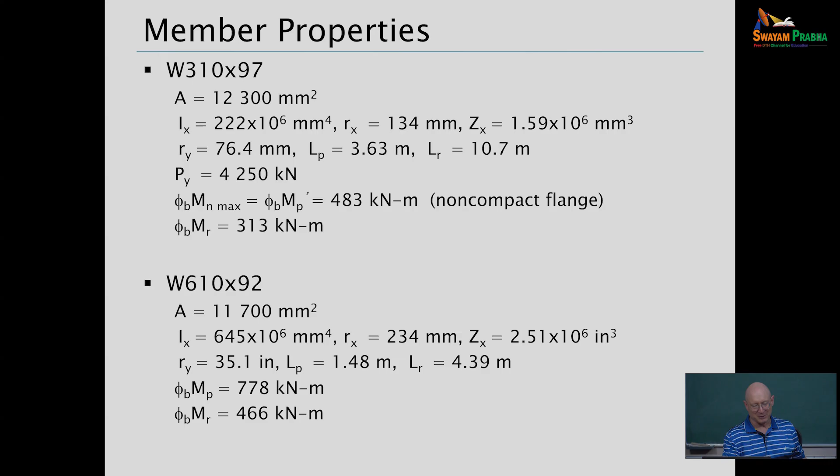Now, a few other things. Often when I do this example with my class at Georgia Tech, I'll bring some handouts on some of these pages so you can keep these in front of you as we're looking at further things. This is kind of a summary of information that we'll use as we move further, in terms of the section properties and some of the capacity properties for these members.

So, big picture here - this is the type of structure if you're thinking about where can I encounter the largest second order effects, where I have to be really careful. It's not on a high rise. On a high rise, lateral load is important, but we're going to need to control stiffness on a tall frame, and you get P delta effects, not like what we're seeing here.

In a structure like this, there's very little wall area on the end of the building to catch wind, so you're not getting big wind loads on the overall structure, relatively speaking. The structure tends to be relatively light, so seismic is relatively small. But if you're in an area where you got a big snow event, you got a huge amount of load from snow on that roof, and it's a big footprint of the building. Guess what? Because your wind loads were low, your seismic loads were low, you don't have much lateral stiffness, but now you got a huge vertical load - you're going to have a tremendous second order effect.

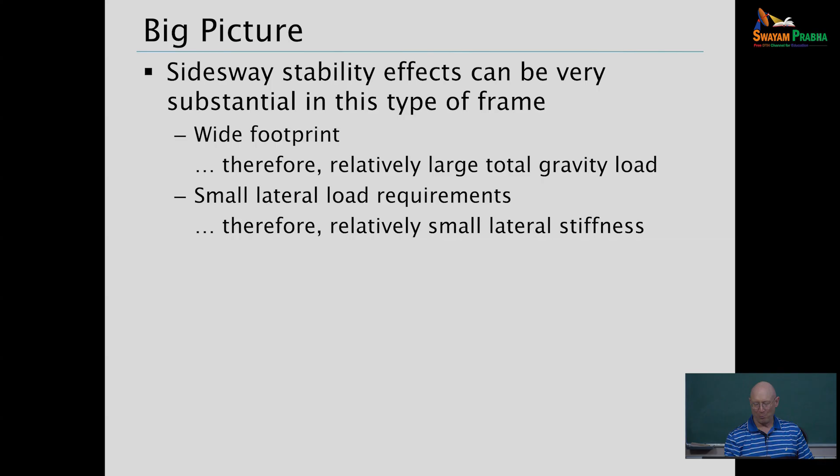And metal buildings, typically the metal siding, the cladding on the structure is very forgiving, very flexible often, so we can tolerate large drifts. We don't have to worry about controlling drift for serviceability considerations. Everything's in the mix there to where you've got to be really careful on this sort of structure with your sidesway stability effects.

So again, if you want to keep this page in mind - this is something where often I'll provide this as a handout so you can look back at this while we're working through things. There's nothing special about what I'm showing you here on this page. It's a way that I'm going to set things up to do the bookkeeping for our analysis.

What I want to do is run a unit lateral load analysis on the structure and document what moments and axial forces I'm going to get. Then for whatever values of axial forces and lateral load I need to work with later, I can multiply that by the results for the unit lateral load and add the effects up.

Okay, so there's my unit lateral loads. I'm putting half on each side of the building just to avoid any small axial shortening or elongation effects in the roof girders. If we consider the first order sidesway due to H - I need to make sure we're all on the same page - we're running the direct analysis method here, and so by AISC rules...

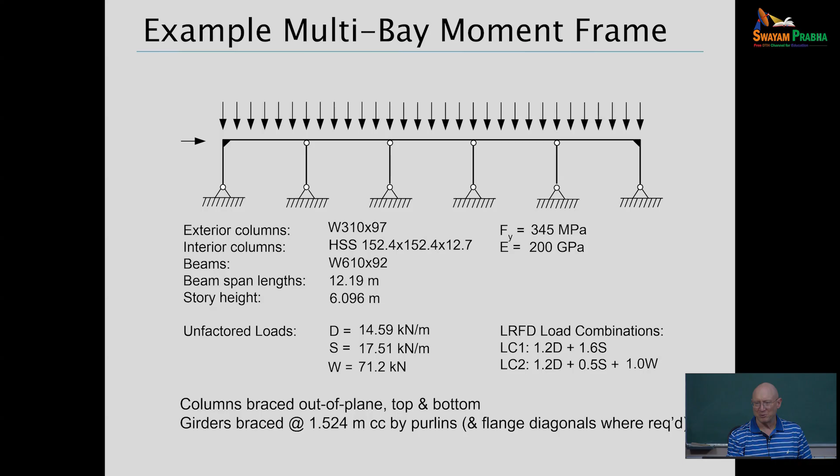But here's where things are very different in the Americas. We would say, on this frame, if I'm going to do the direct analysis method, I'm going to analyze everything with 0.8 of the nominal elastic stiffness. That's a very rough attempt to approximate the stiffness I'm going to lose from yielding, etc., as we're approaching strength conditions. So all these analyses are being done that way. Well, these are first order analyses.

So if I do the analysis, what's my first order drift? It's 1.698 millimeters. That's with the reduced stiffness. And so I can do a PL story here on this, H divided by delta H over L.

And so I get from that calculation 3,590 kilonewtons per radian. That's a stiffness in terms of a drift ratio. If I want to think about what are the two columns on the ends of the building doing, they're both essentially contributing half of that story lateral stiffness.

So PL being just the lateral stiffness for an individual column, half of PL story here. And if I equate that, this is just a way of trying to understand what sort of stiffness characteristics we have in our structure. So I could calculate PL as a coefficient times 0.8 E I divided by L squared. If I take that, I know E, I know I of the column, I don't know beta L, I know L, I equate that to half of PL story, solve for beta L, I get 1.884.

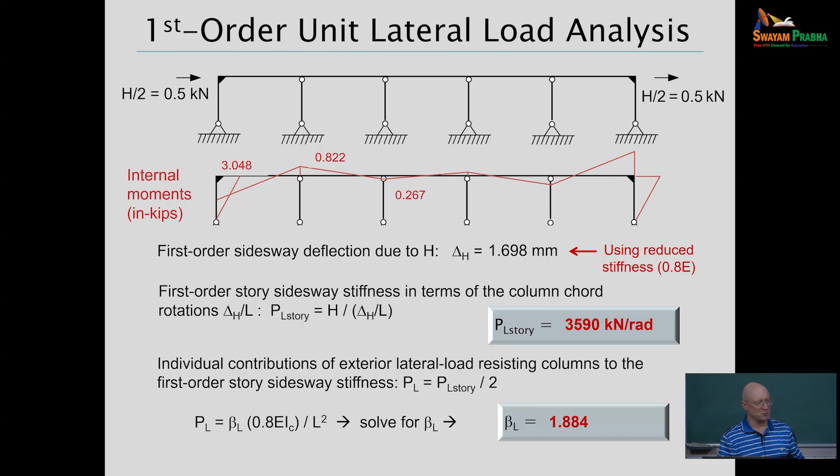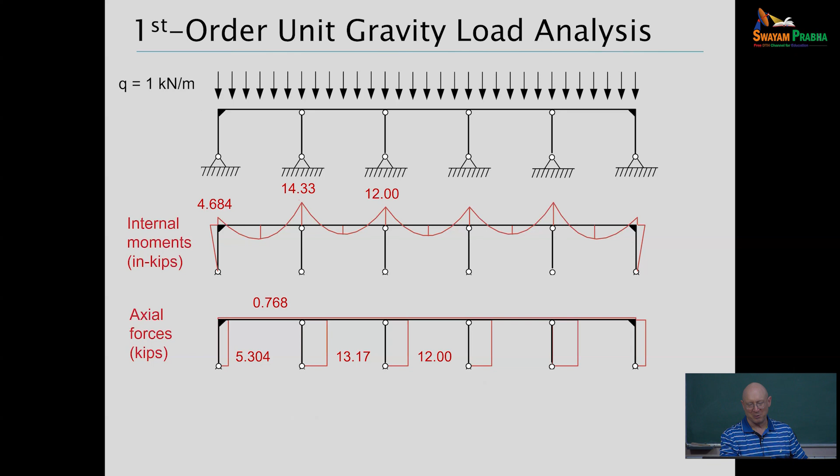You've got 1.884, so that's because of the flexibility of the roof girders. If the roof girders were rigid, I'd get to 3. All right, I'm going to do also a unit gravity load for bookkeeping purposes. So we'll need to glance back here with some of the things we're going to do in a minute for the bookkeeping.

All right, so let's analyze load combination 1. It's 1.2 dead plus 1.6 snow. We want to look at checking our design by the direct analysis method. We'll use the amplified story drift method and the B1, B2, or NTLT method that I showed you earlier, and we'll compare to general purpose analysis results.

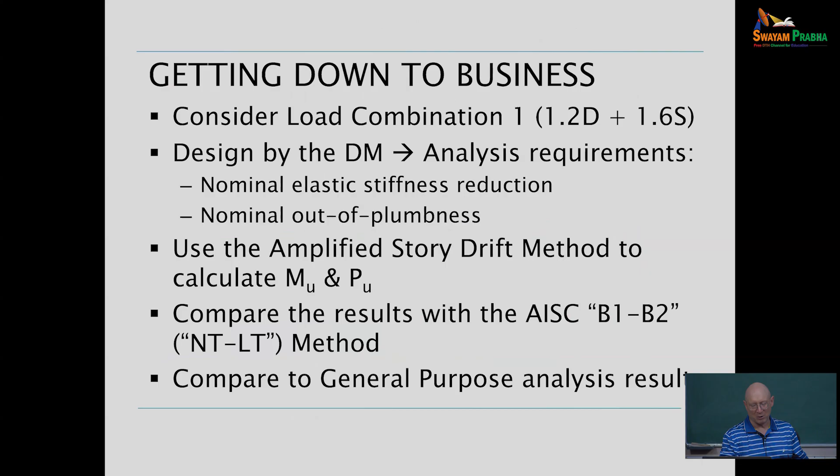All right, so we need, if we're going to use an amplified first order analysis, we need B2. Our distributed load, our factored vertical load on the roof girders is 45.5 kilonewtons per meter. And so if you do QU times 5 bays, each bay is 12.19 meters, we've got a whopping 2,773 kilonewtons vertical load that's being stabilized by the lateral load resisting system, we hope.

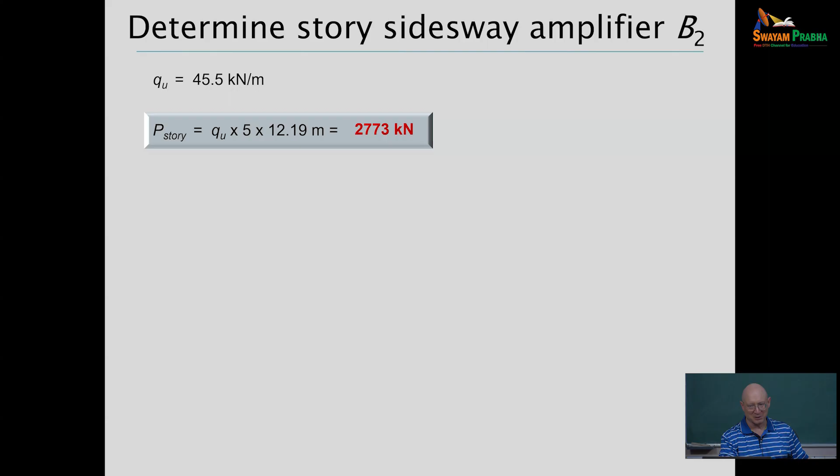All right, so you can say, well, what's the leeward column axial force? So if you go back to the unit vertical load slide that I showed you a minute ago, the leeward columns given a unit vertical load had an axial force of 5.304 kilonewtons per unit kilonewton meters on the roof. So if I multiply that by QU, just from gravity load, my leeward columns have 241 kilonewtons in them.

Those are the only moment frame columns here. The two exterior columns are moment frame columns. Everything else is a gravity column. It's leaning, right? And so my PMF is 2 times PU, 482.

I need an R sub M. I can get that since I've got P story and PMF. R sub M is getting very close to 1 on a frame like this. That's not uncommon when we have a lot of gravity framing, 0.974. Now the direct analysis method, if we have heavy axial load in the columns larger than 50% of the yield load, requires that we also apply an additional inelastic stiffness reduction factor to the columns, but P over PY is only 0.057, so that stiffness reduction factor is 1.

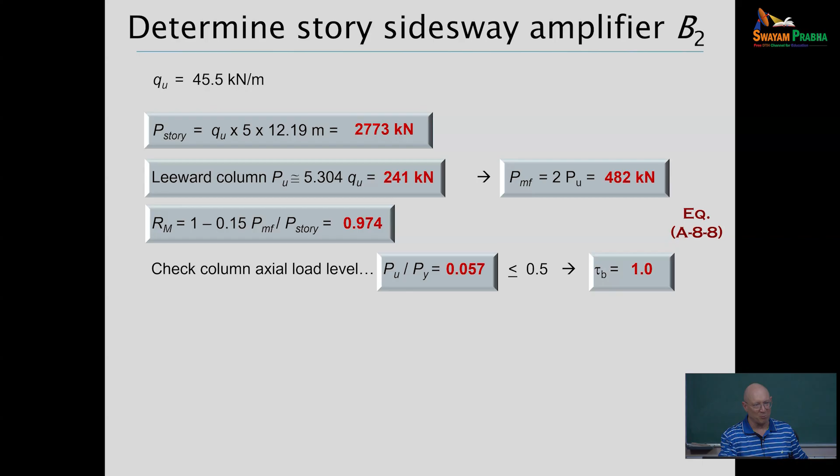All right, now, I didn't really show you this notation before, but Appendix 8 basically refers to it as PE story, and that PE story is the estimate of the story elastic buckling load, and it's equal to R sub M times PL story. We did look at that before. And so if we do R sub M times PL story, 3497. But very close to PL story.

So notice, again, this whole emphasis of stiffness with our analysis relative to the vertical load that we're stabilizing. Those are the two big gorillas in the room. Okay?

And why did we call a stiffness PL? Because ultimately the elastic buckling load of the frame is close to PL. We're just hitting it with R sub M to account for some P small delta effects on the large delta.

All right, so we're ready to calculate our B2 factor, and we get 4.83 with this reduced stiffness. So holy smokes, that is a huge amplifier. Are you serious? If you do the analysis of this frame with nominal stiffness, you get 2.74.

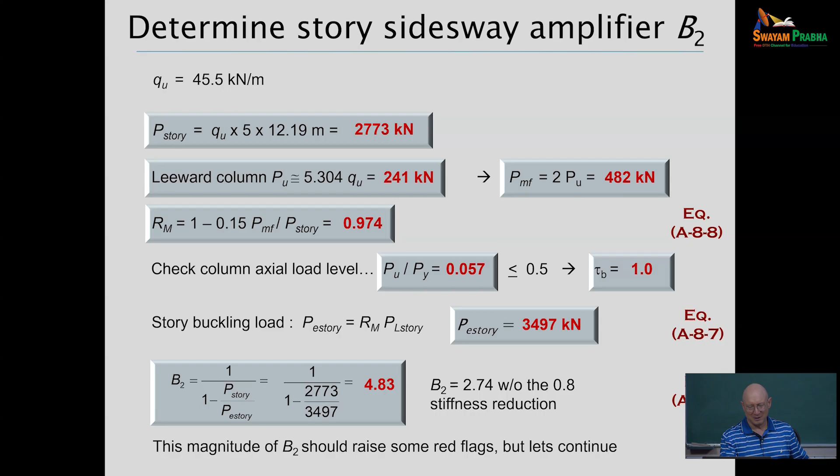This frame is actually going to work. It has a lot of drift, a lot of second order effect, but it works.

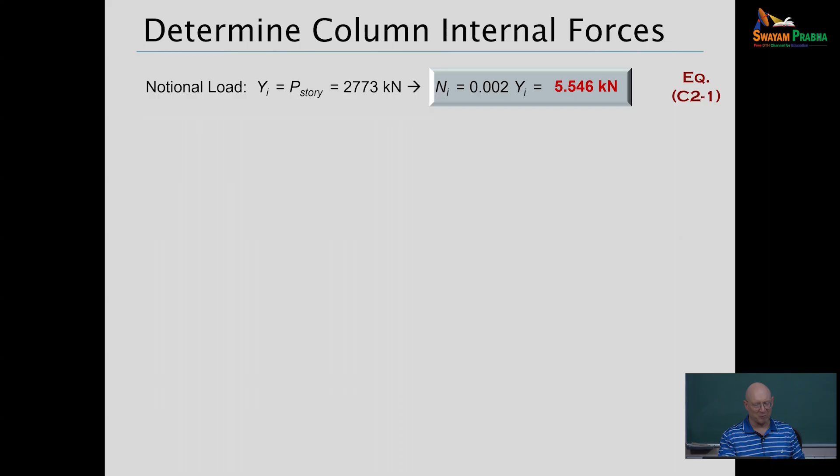All right, we're going to do notional lateral load to get our approximations. By the American standard, we use 1 in 500 times the vertical load at each level, just being the roof here. So our notional lateral load with 2773 for the total load, we get 5.546 kilonewtons.

So what sort of lateral deflection do we get in our frame due to the notional load? Our lateral deflection due to unit load was 1.698, and so we're looking at 9.717 millimeters lateral movement due to the notional lateral load.

This is a first order effect. If you said, okay, the frame is out of plumb, the first order effect of the vertical loads acting through that out of plumbness would give us a 9.717 millimeter lateral deflection.

But for design, if we're checking second order drift, we need to hit that with our amplifier B2. And so, okay, this frame is drifting by 45.48 millimeters under this factored gravity loading.

Again, remember when we're doing strength factored loads, these are loads that we hope the structure will never see. But we design for those loads because we are required to have sufficient strength. And there are serviceability design considerations that we generally use in structures, but when it comes to satisfying strength, generally you could say, well, oh, the structure took the load, I'm happy. It worked. It may look like sin in terms of huge deflections, all distorted, but it took the load.

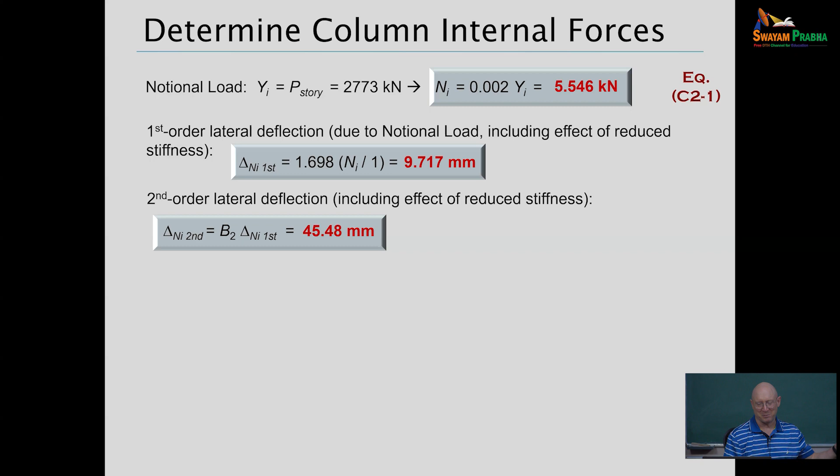We're good. Okay, now let me do serviceability and fix a few things. For these metal buildings, we're able to tolerate a high drift, so it may not be a problem. I'm going to work the amplified story drift method.

So in addition to what we just did with the notional load, we need a HP delta shear. So that's why I got the second order drift. The P delta force represents the effects of the lateral movement that we get. Again, this is actually a symmetrical frame, symmetrically loaded, so without any initial out of plumbness, there's no movement.

But the notional load gives us the first order effect of that out of plumbness. Then we consider the additional second order effect. How much more does it move once we put the load on there? And that's what the HP delta is working on here.

So the HP delta story shears, those are 20.69 kilonewtons. So I need to take the combination of that plus the notional load. That's my lateral loading effect that's equivalent to what the vertical loads are doing and acting through the lateral drift.

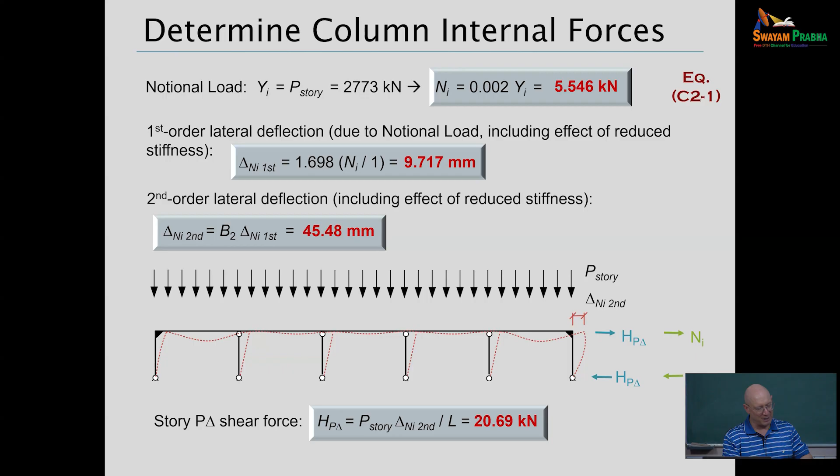All right, so given that, we can now calculate a column force. We get some additive compression on the leeward side because of the overturning effects, basically of the P delta.

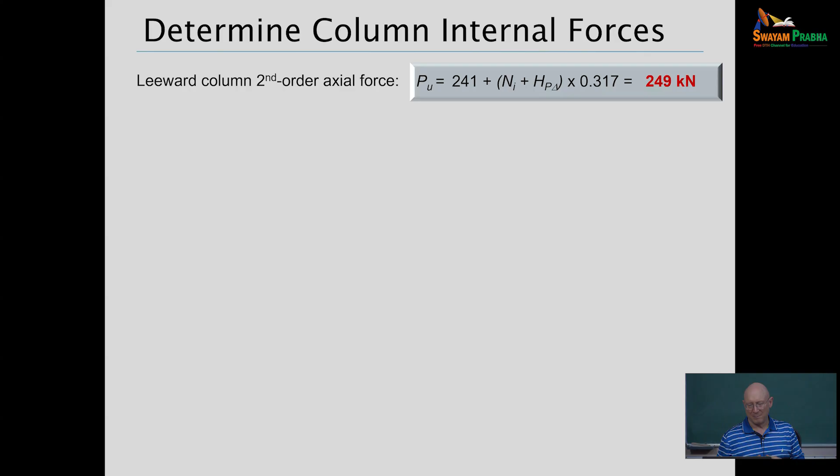And so those effects are, well, 241 was just from our gravity load that we calculated earlier. We just did our notional load plus the P delta shear. 0.317 is the axial force for a unit lateral load, if we go back to the previous slide. And so my overturning effects and the second order effects are basically increasing my axial compression in the leeward column by about 8 kilonewtons, to 249 kilonewtons.

Generally, we need to check a non-sway amplifier here. So if we do that, again, this is part of the analysis, so I use a reduced stiffness here as well. So you see the 0.8E in this equation.

And so the PE1 here is 9434. C sub m, anybody tell me what the C sub m should be on the column? 0.6. We've used it multiple times now. It's just the first order moment diagram is linear, so we go with that. C sub m is 0.6.

And so we do a B1. Again, you do a few of these and you realize that B1 is 1 for these.

All right, so the way the amplified story drift method works, we've got the moment at the top of the leeward column. Due to a unit vertical load, it would be 4.684, but the vertical load is actually 45.5. And due to a new unit lateral load, it would be 6.096.

And we get half distributed to each of the columns here from the notional load plus the P-delta shear. The combination of all that gives us 293 kilonewton meters. That's our amplified story drift method estimate of the moment we need for the design of this column.

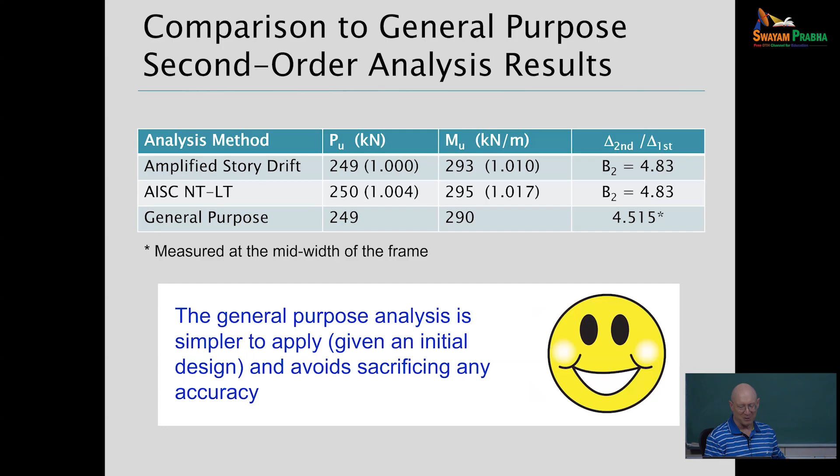All right, so let's do a leeward column resistance check. I'll get a little bit into the resistance calculations here.

With the direct analysis method, we need to basically look at flexural buckling of the column either out of plane or in plane. But out of plane is clearly going to control here with the direct analysis method. The routine practice with direct analysis method is you're allowed to use K factors equal to 1, because you've already accounted for in-plane stability effects through putting in the notional lateral load and by putting in the reduction in stiffness.

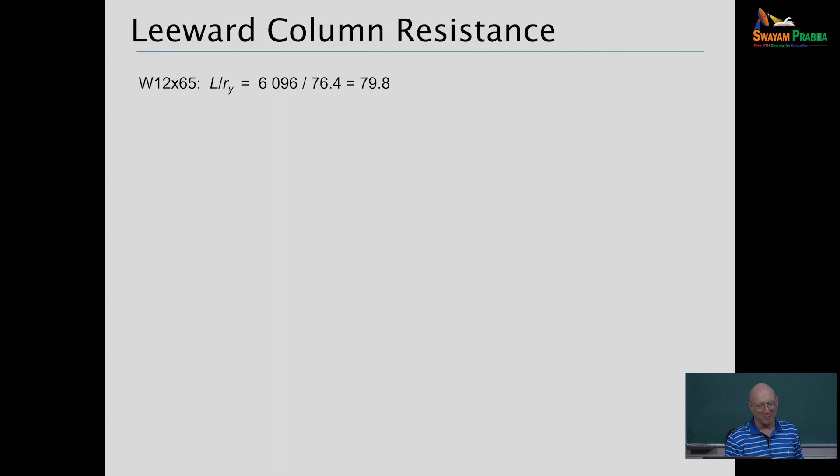So I would have an L over Rx, but Rx is going to be much larger than Ry. I've got an L over Ry here since I have bracing only top and bottom out of plane, so that's going to be the governing slenderness for the column. The weak axis flexural buckling governs.

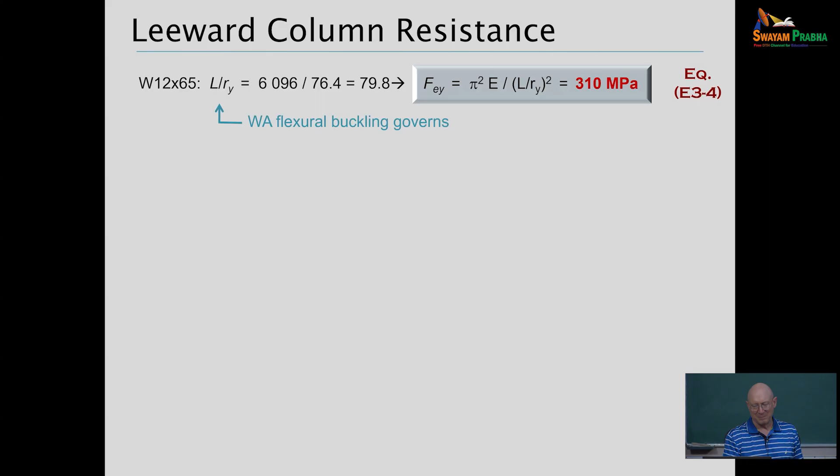And so if we put that into the equation for the flexural buckling stress of the column, basically the Euler formula, we get 310 megapascals. Notice there's no stiffness reduction here. This is often a confusing matter with the direct analysis method - you have to look at it in two separate sets of solutions. You do your analysis with reduced stiffness, but then when you move to calculating resistances, if you see an elastic modulus there, it's the unreduced modulus.

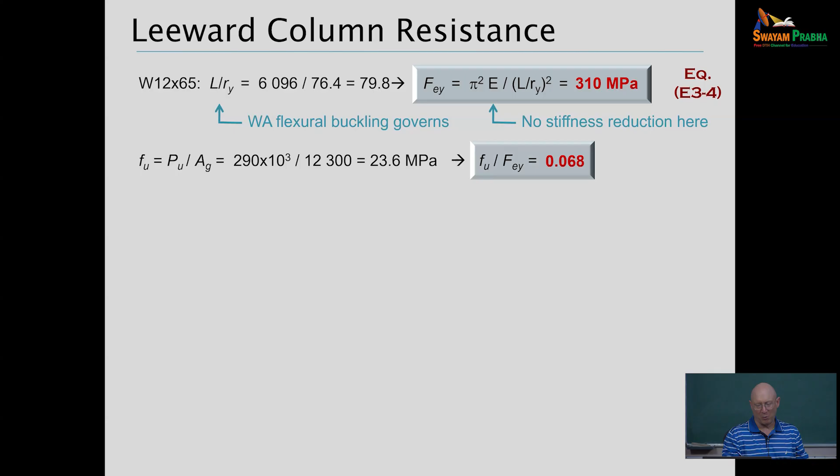We can check our level of axial stress in the column. It's fairly low - FU to FEY is only 0.068, that's less than 0.1. And there's actually a rule in Design Guide 25 for design of frames of non-prismatic members: if your axial load level is less than 10% of the yield load level in the column, you can just use the cross-section strength, which in this case is yield load.

So a phi factor of 0.9 on yield load gives 3,825 kilonewtons. And if my column flange or web were classified, if either were classified as slender, I'd have to do an effective yield load of the column. Here in this case, they're both non-slender.

Now, for the flexural resistance, we need a moment gradient modifier, and for a triangular moment diagram, we typically use C sub B as 1.75. That's a modifier to account for the fact the moment is not uniform when we're designing the member for flexure. And there's the plateau strength.

Turns out that this W12 by 65 is just slightly non-compact, basically meaning it's slightly into, I believe, if I'm correct with the Indian code - it parallels Eurocode, and you'd say this is class 3, so class 3 flange, or semi-compact. If we did the calculation there, the plateau strength, considering the reduction for flange local buckling, is just 1% or 2%, and it's 483 kilonewton meters.

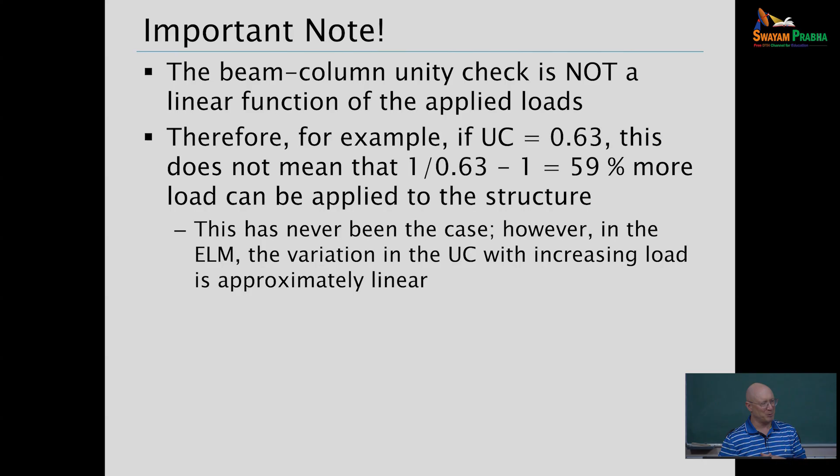There's also some roof girder checks on this, but I usually, in my class, I say, okay, kind of look at that. It's a very dense summary of how you could also check the girders here.

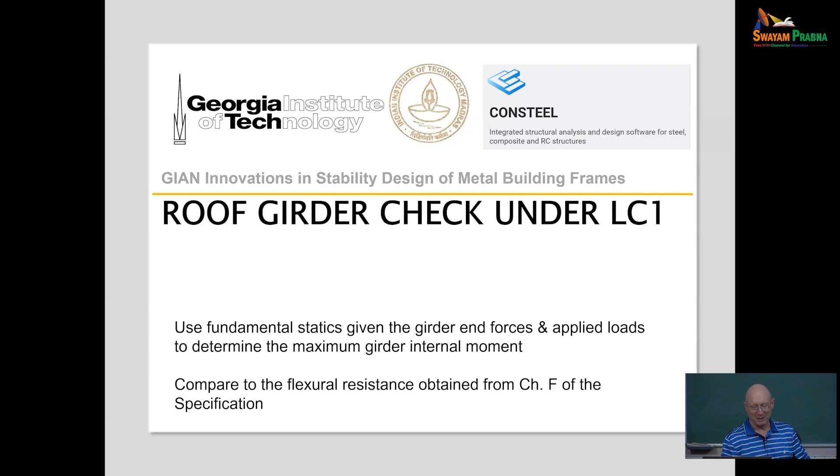And so those are good. I think maybe it might be good to, since we're right at 6 o'clock, call a timeout for the day and stay within time, and then we'll pick up and do the last piece here, the topic where we'll look at how all this works relative to some test simulation results, where we do a full-blown plastic zone, full nonlinear analysis, and compare our results to what we're getting. That's probably a good one to see when we're fresh tomorrow.

Some important takeaways there in terms of how does direct analysis method work, how does the real frame work here for this very sidesway stability critical frame versus, well, hey, if we're using effective length method, we can still get the frame, it still will work to a certain extent, but the effective length method has its weaknesses for a structure like this. So this is where my colleagues in Eurocode would say, look, we don't believe in stiffness reduction.

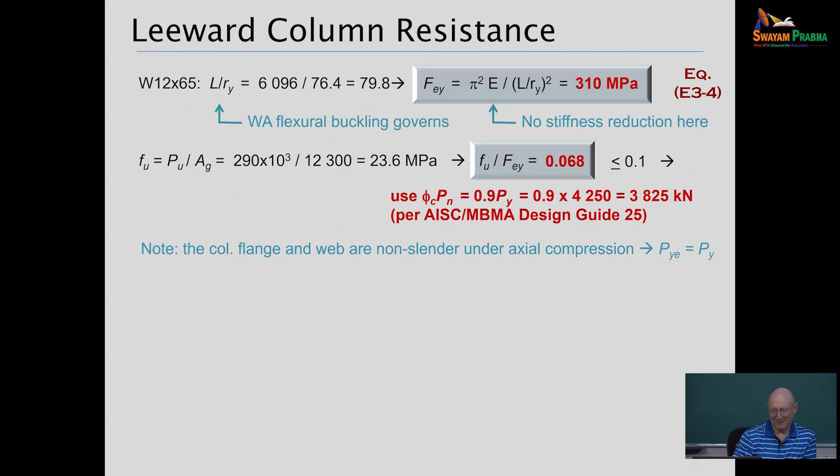Sorry, go ahead. So this particular problem, whatever we've seen in the example, what is the first order moment, and we see the direct analysis method utility ratios. So what could be the first order analysis if we do? That's a good question. I don't really have it directly in front of us here on the slides.

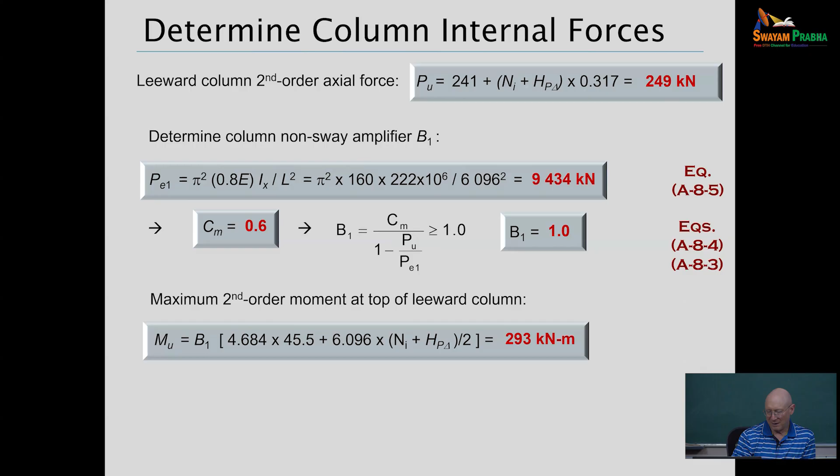The fact that, let's see, it's probably easiest to see it with the NTLT method. So if we take the NT and LT forces here, or moments, if we set B2 equal to 1 here, then you'd get the first order result. And our B2 is 4.83, so you can see we're getting some huge larger effects in this structure.

So it means that if we do a frame by first order analysis, and if we go to direct analysis second order, we can see this is amplified almost 4 times. Yeah, that is correct. Huge amplification. So whatever buildings we are designing with first order analysis, if we do the same with second order, the direct analysis method, it will fail by 4 times. So this is a first order analysis here, and we've incorporated that amplification and gotten our results.

But that is correct. That actually scared a lot of people in LeMessurier's work when that was first published, and in some other presentations in United States practice, engineers would be at the seminar and say, 'What? I haven't designed my frame that way.'